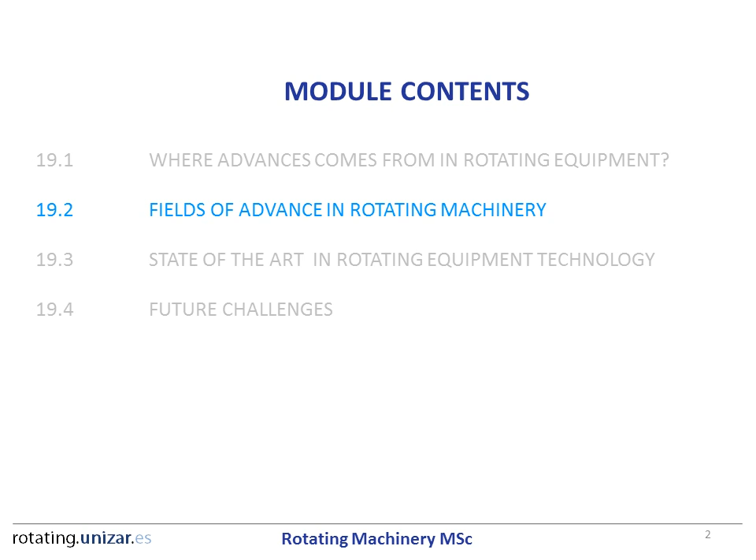In order to make understandable all the developments and advances in the rotating equipment area, for teaching purposes, I believe it's better to dedicate special attention to several fields related to the oil and gas sector, because this master is dedicated basically to that. So all the subfields of analysis will be upstream, downstream, petrochemical area, and energy, conventional or alternative. We will try to explain what are the advances in those areas.

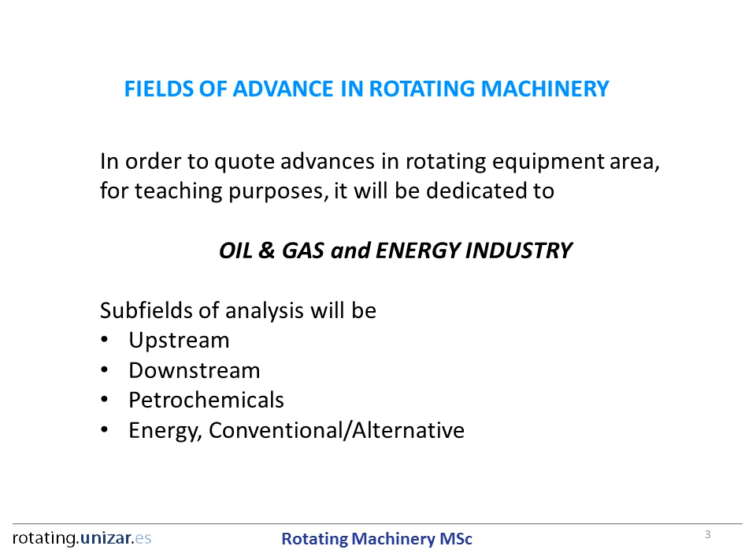We are not going to talk about rotating equipment itself now; that will be done in the next chapter. But now I wanted to show you what the necessities are and why you need to satisfy them, so you understand in the next chapter why the advancements have been made in that area.

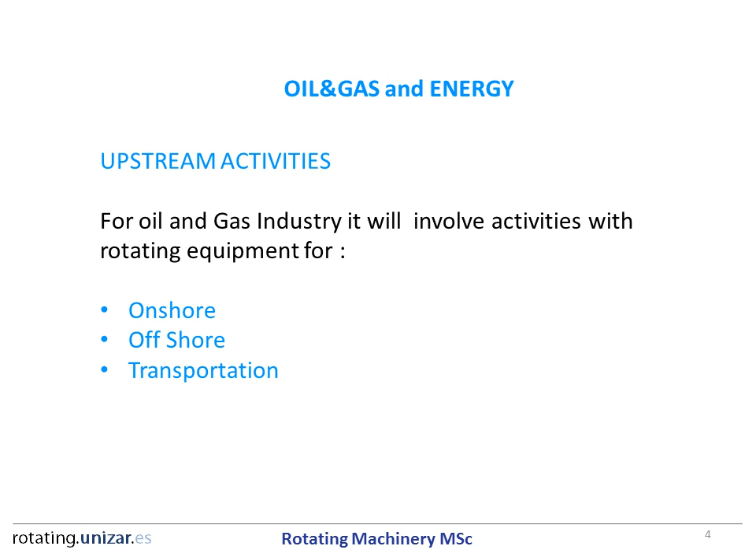In the upstream side, for the oil and gas industry, it will involve activities with rotating equipment for onshore, offshore, and transport. In the onshore area, we will need to divide this into several subareas. One of them is the production fields.

All the activities related to oil production right now have a higher demand for really big pressures, bigger gas volumes, and especially the tendency to receive gases that need to be handled by the rotating equipment with high contents of H2S.

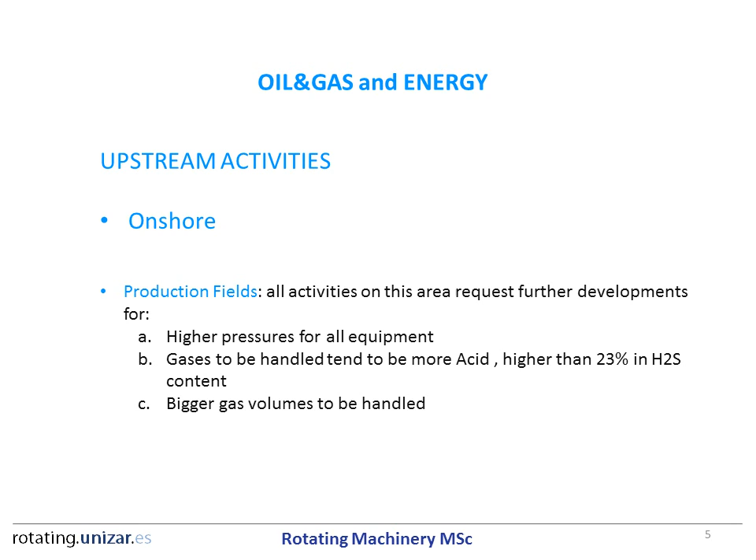In the onshore area, even though there is a big polemic right now around the world about fracking or specifically shale gas activities moving all around the United States and especially in the UK, all activities in this area request further developments in equipment adaptability, because you have to do the drilling in a way that requires moving all the equipment.

The equipment is normally mounted on trucks, so compressors and pumps should be easy to move from one side to another. Emission controls are also important here, because the shale gas located around the world is, in most cases, in urban areas. So one of the main things is that you have to respect the area where you are working, and of course the equipment should be reliable and flexible.

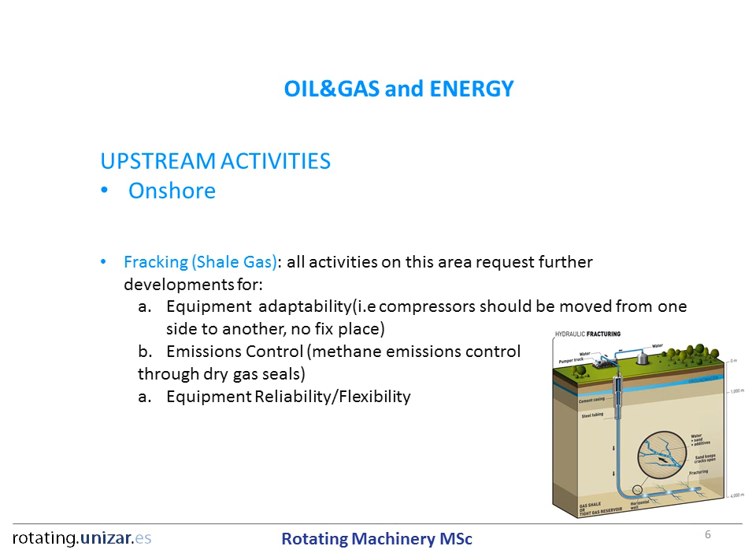As you might know, the onshore activities in North Canada dedicated to oil sands are one of the most important areas that has been creating a lot of developments in rotating equipment. I'm not going to talk about oil sands itself, because that technology has been developed in the past, and now most research in that area is coming to an end.

Most of the crude oil that needs to be extracted is not anymore just in the ground. You need to drill a little bit, heat the oil a little, and get it out. One of the technologies used right now is steam assisted gravity drainage, called SAGD.

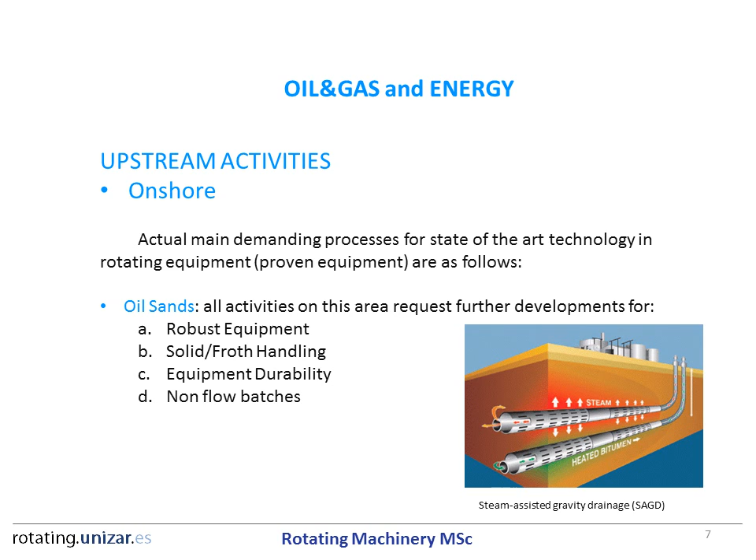For SAGD, normally you use robust equipment, solid froth handling, equipment durability, and non flow batches. You need to pump a lot of vapor into the ground to basically melt the oil, and later on you suck the bitumen directly with a pump or a compressor. That's the state of the art of this process.

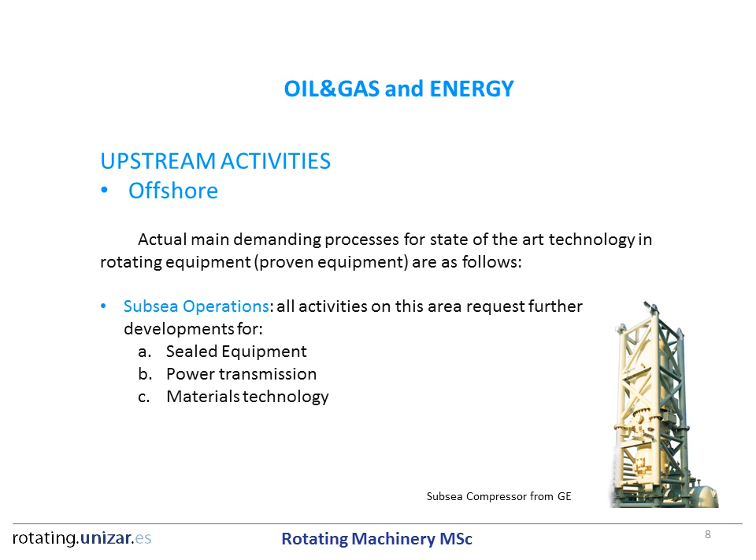For subsea operations, you will see later on in the information included in the folder that there is a lot of developments. If you want to take out the crude oil from the subsea, it's better to go under the sea. Under the sea you can find a lot of developments, but you have to take in consideration that most of the equipment applied there is sealed equipment. You need to take care of the power transmission, and also, not less important, the materials technology that you are applying there. It's very special because it's a salty solution.

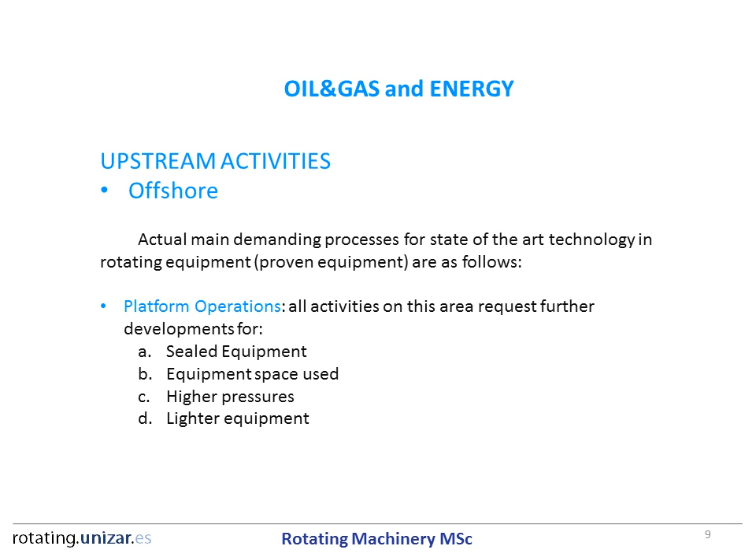Platform operations right now is one of the, let's say, mature technologies, but the tendency in this area is that you need sealed equipment all the time. You have to consider that the equipment is occupying space and should be as short as it can, and of course you need higher pressures and lighter equipment in order to plan all the platforms in a way that it can be really reliable and also inside cost.

For this purpose, FPSO, floating production, storage and offloading, has been a technology developed like a small cluster. You can get oil directly from the platforms, you can get oil directly from the subsea, and you concentrate inside the ship all the rotating equipment to allow you to produce, store, and later on offload the crude oil or the gas that you are getting from those areas. So take into consideration that the space to be used is a very important variable here. The equipment, of course, should be light and should be efficient for the job it has to perform.

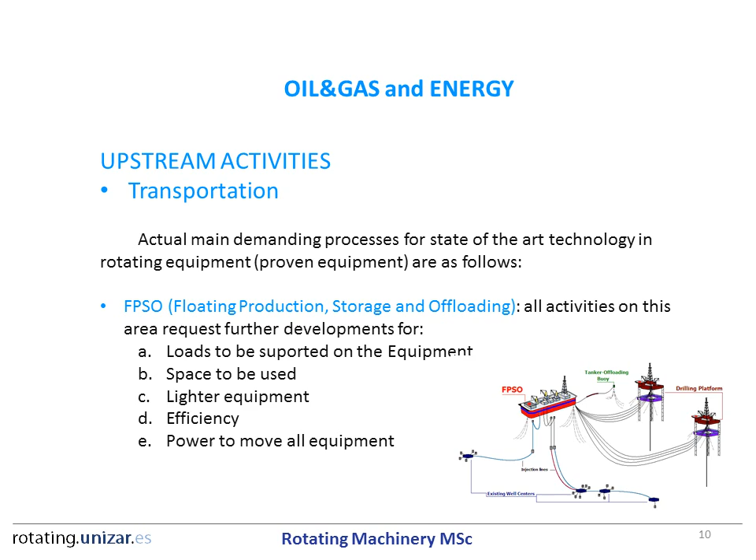Transportation in this particular case refers to the very big pipeline gas transportation. You need to move huge volumes of gas in a way that it should be automatic. So all the centrifugal compressors and axial compressors used in these applications right now has been growing in the last 10 years.

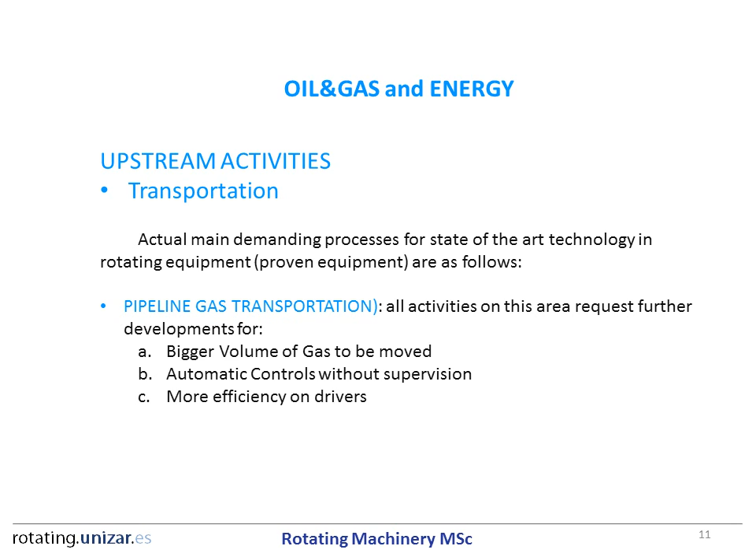When you move to the downstream activities and the refinery, let's say it's also a mature market where almost everything there is tested and has been in production for at least 10 years. But one of the things this environment is moving toward is that refineries are having more emission controls. You have inside the refineries more acid gases, and reliability and maintainability are some factors that you have to take into consideration when you want to apply rotating equipment over there. Health and safety are really one of the strongest concerns in the market.

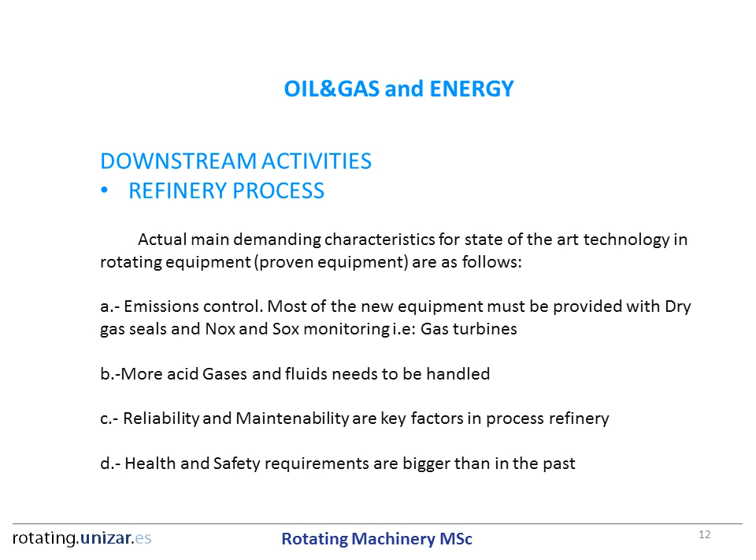Petrochemical is a little bit more related also to the downstream area. Here the main difference is that you have a lot of emission controls because NOx and SOx control rotating equipment is very key, and also all the new materials improvements in this area are applied to all of the equipment in a way that you can test them. Every single liquid or gas that they are handling is a very good opportunity to test whatever equipment you are planning to use.

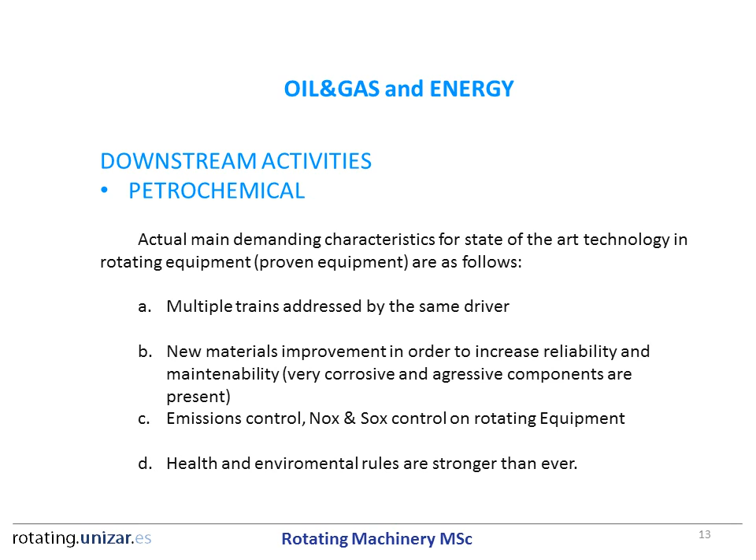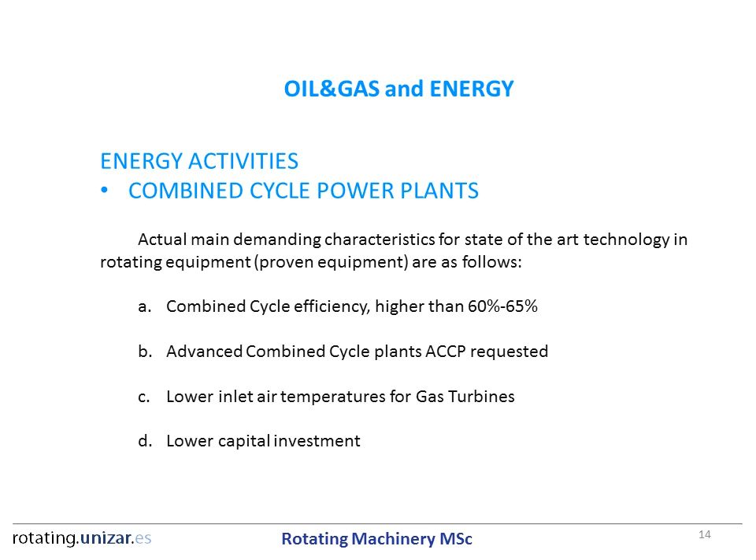For combined cycle power plants, one of the most important things is to get higher efficiencies. Now advanced combined cycle plants are requested because you can get higher efficiencies in that area. But one of the most important focuses in this area is to lower the inlet air temperatures because the gas turbines could be more efficient. At the end, there is also a compromise between how much money you want to spend on this combined cycle power plant, the efficiency you get, and the capital you need to use.

Basically here, guys, I want to show you several processes and several scenarios where all the factors are indicated to apply a particular rotating equipment. So when you are going to move into a technology, you have to consider the parameters where the application is going to be used. Thanks for hearing that part of the slides.